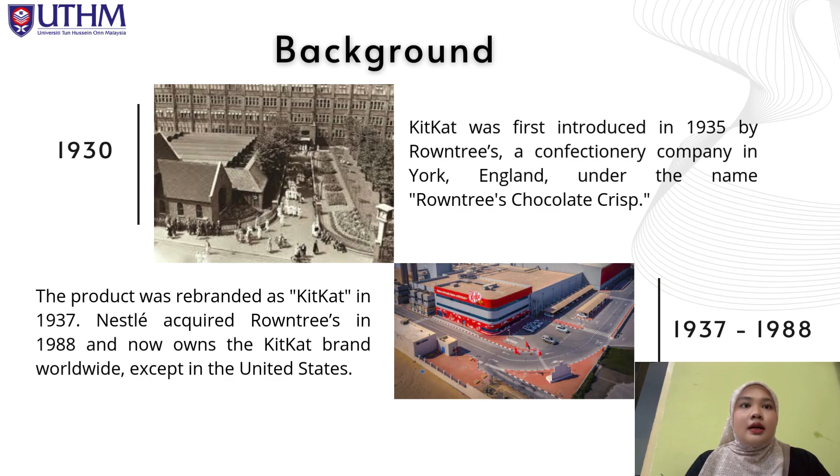Fast forward to 1988, and the brand underwent another significant shift when Nestle acquired Rowntree. Since then, Nestle has owned the KitKat brand worldwide, with one exception - the United States. In the US, KitKat is actually produced and marketed under license by Hershey. So in just a few decades, KitKat grew from a simple British treat into a global icon, enjoyed by millions across the globe, all starting from a small factory in York.

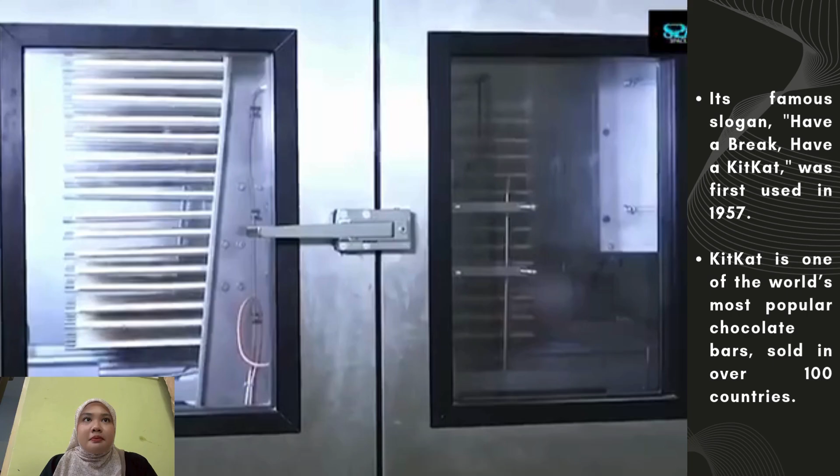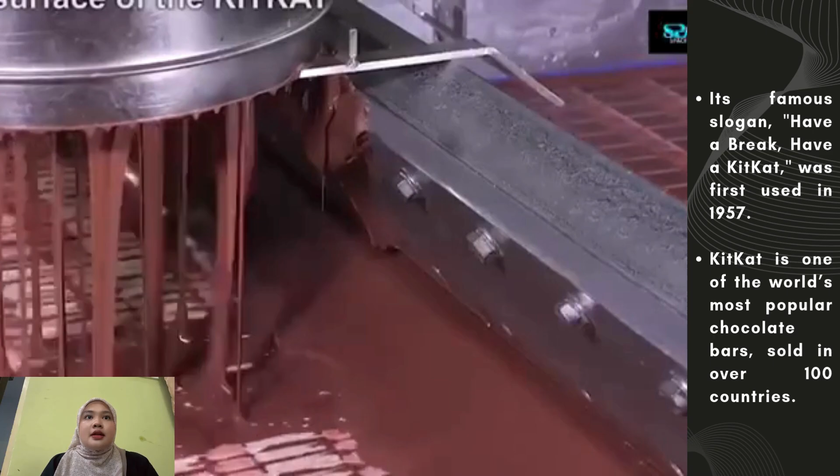Now let's talk about what truly made KitKat unforgettable. In 1957, the world was introduced to the phrase 'Have a break, have a KitKat.' Simple, catchy, and relatable, this slogan perfectly captured the idea of taking a moment to enjoy life's little pleasures. Over the years, it has become one of the most recognized advertising lines in history, cementing KitKat's place in popular culture.

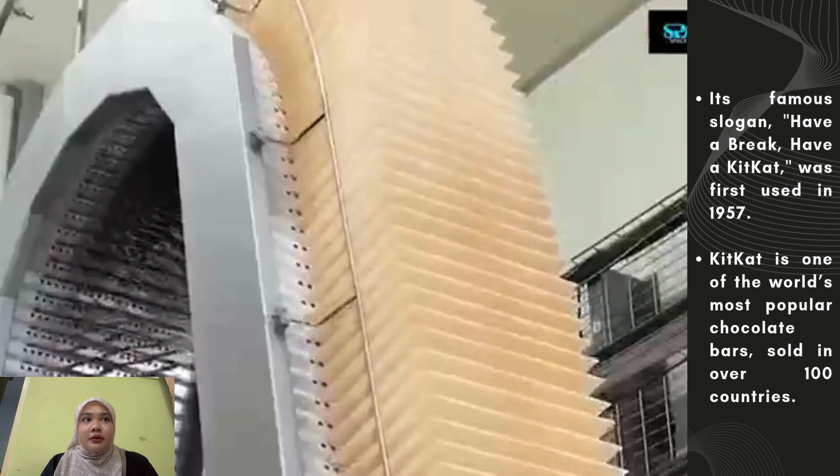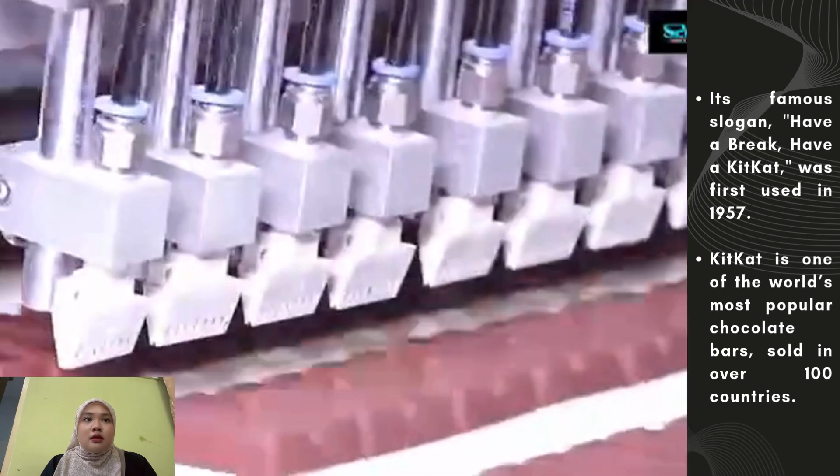But KitKat's success isn't just about its slogan - it's also about its universal appeal. Today, KitKat is one of the world's most popular chocolate bars, available in 100 countries. From the streets of Tokyo to the cafes of Paris, KitKat has become a global favorite, loved for its unique combination of crispy wafer and smooth chocolate. So whether it's the iconic slogan or its global reach, KitKat continues to delight chocolate lovers everywhere.

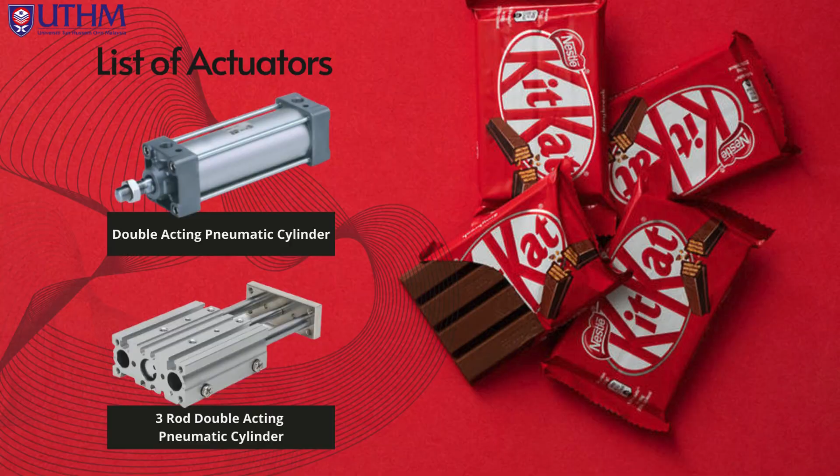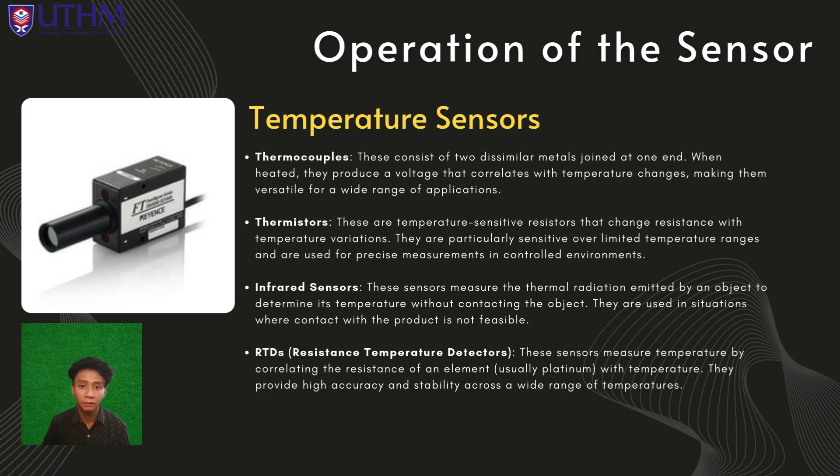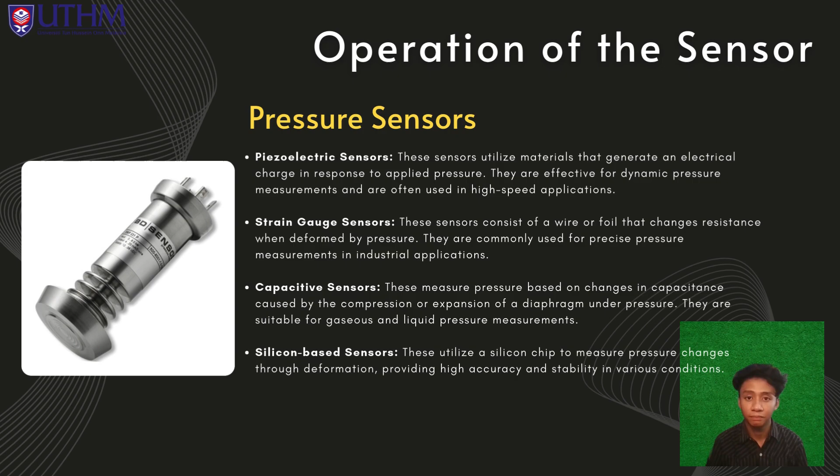Lastly is the quality control sensor, which is a light sensor. There are four types: photodiode, laser sensor, charge coupled device, and optical sensor. For the photodiode, this semiconductor device converts light into electrical current and is used for precise measurement of light intensity.

Secondly is laser-based light sensor, which can create a 3D image of the product by measuring the time it takes for the laser pulse to reflect back. It allows detailed inspection of the product dimension and surface condition.

Thirdly is the charge coupled device, CCD, often used in cameras. This sensor captures light and converts it into an electronic signal, useful for detailed image analysis and quality control.

Lastly is the optical sensor. They include infrared sensors that detect specific wavelengths of light to inspect color and brightness variation in the product. So the use of light sensors or quality control sensors is to inspect product appearance to ensure consistency and quality.

Detect defects and deviations in the packaging that could affect product aesthetic and marketability. It also assesses light reflection from the surface to monitor contamination or surface quality.

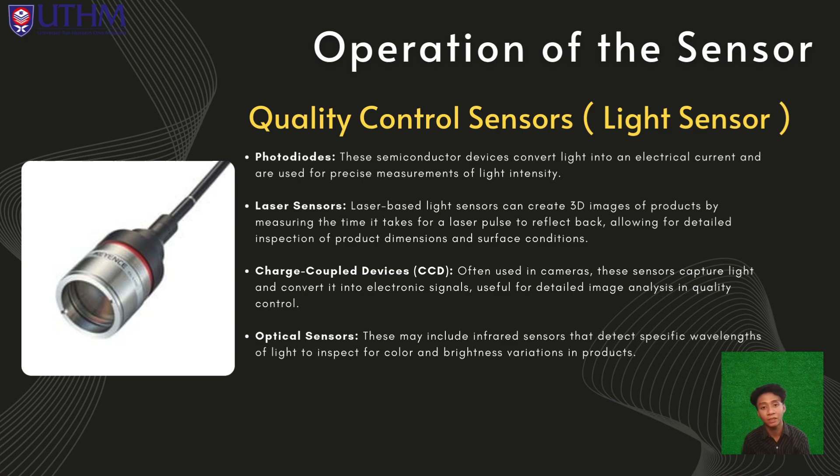For the operation of the actuator, the first identified actuator is the double acting pneumatic cylinder. This was found in the video at timestamp 206. It is seen when the wafer is being grabbed to be placed onto another position.

Multiple cylinders function together as a large gripper to grab the stacked wafer. From the video, we can see that there are at least four of these double-acting pneumatic cylinders on two sides of the gripper.

It uses compressed air to extend and retract the gripper connected to the end of the rod. The compressed air will flow and allow the cylinder to retract and extend accordingly, which also allows the machine to grab the wafer and move it to another place.

The next actuator found was the 3-rod double-acting pneumatic cylinder. This was found at timestamp 223. This was also found to move the stacked wafer, but this was when the wafer was already cut.

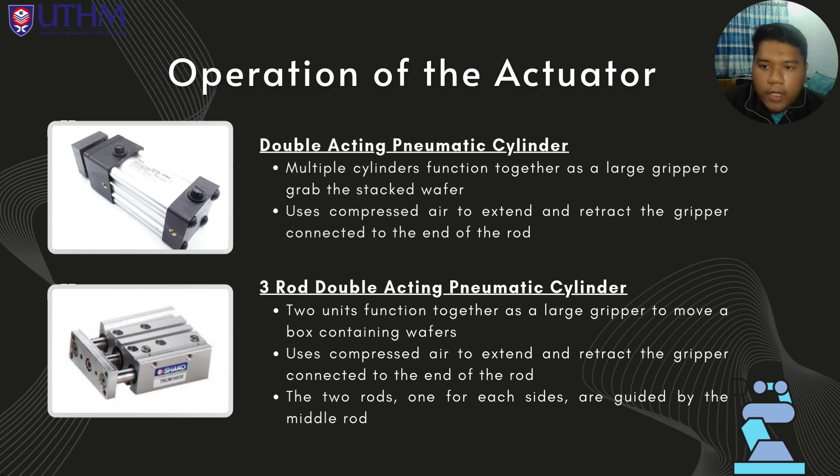I would like to present information about sensors. The factory utilizes a variety of sensors to monitor and control the manufacturing process. These sensors play a crucial role in ensuring product quality and safety.

The first point of information about sensors that we get through this video is the temperature sensor. Temperature sensors monitor the temperature of the ingredients and equipment throughout the production line. This helps maintain the proper temperature range for each stage of the process, from mixing to baking and from baking to packaging. The next one is pressure sensor.

Pressure sensor is used to ensure that various systems, such as packaging machinery, maintain appropriate pressure levels during operations. This helps prevent issues like product deformation or leakage.

Other than that is the light sensor. The light sensor is used for quality control purposes. They can detect flaws in the packaging, such as integrity issues, and monitor the appearance of the final product to ensure it meets visual standards. And lastly is the movement sensor.

Movement sensor tracks the movement of the product through the production line. The data can be used to optimize the manufacturing process and identify any bottlenecks or delays.

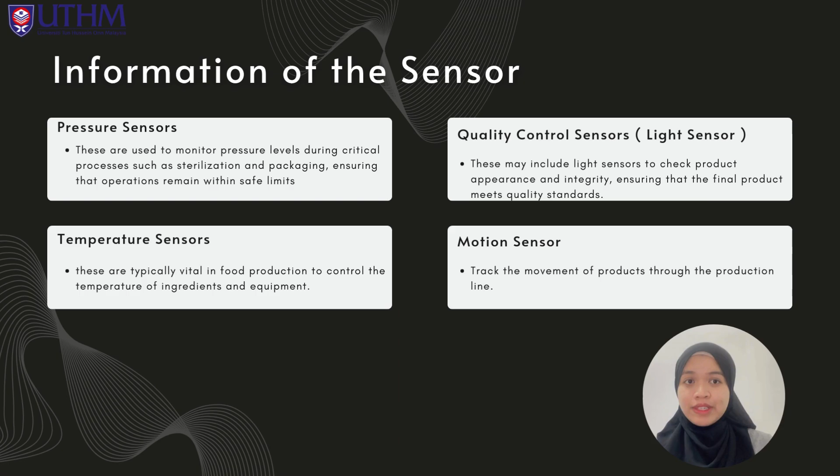Finally, together these sensors will provide the factory with critical real-time data that allows them to maintain tight control over the production process and deliver consistent, high-quality products. That's all for me, thank you.

Next, I will proceed with my presentation about the datasheet information of the sensor. The first one is the CL-L150, a 150 mm quad type sensor head paired with an optical unit. Details depend on the optical unit configuration.

The key features for CL-L150 sensor: first, the type is sensor head 150 mm quad type. The sensor head is designed to work in conjunction with a specific optical unit to perform as a complete system.

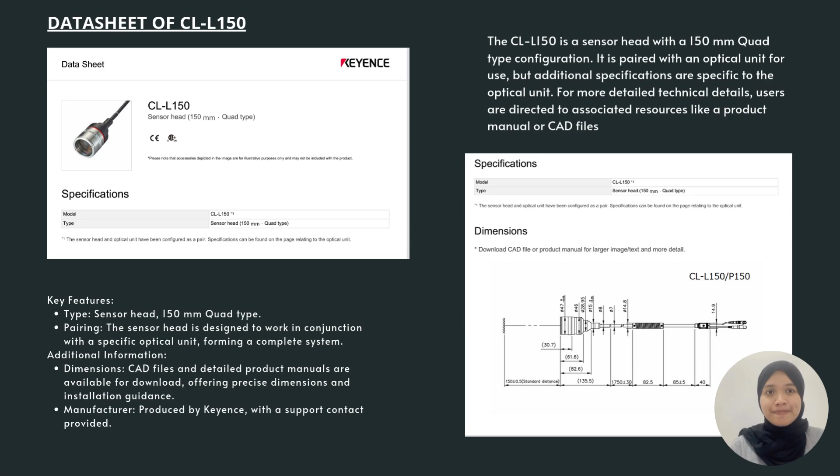DMP331P sensor is an industrial pressure transmitter designed for applications in industry such as food, beverage, and pharmaceutical.

The key features for this sensor: first, accuracy standard 0.35% FSO, optional 0.25% FSO. Next, pressure range 0 to 100 mbar up to 40 bar, gauge or absolute. The output signal for this sensor is 4 to 20 mA 2-wire, and 0 to 10 volt for 3-wire.

Other options are available. The hygiene design is suitable for CIP or SIP cleaning up to 150 Celsius, with low surface roughness. Lastly, the key feature for this sensor is vacuum resistance; it's designed for robust industrial environments.

Last one is additional information for this sensor. This includes optional versions: explosion-proof design, high temperature compatibility up to 300 Celsius with cooling elements, and special diaphragm Hastelloy and tantalum. This includes certifications: inspection certificate 3.1, test report 2.2, and optional SIL2 compliance for safety. Lastly is construction.

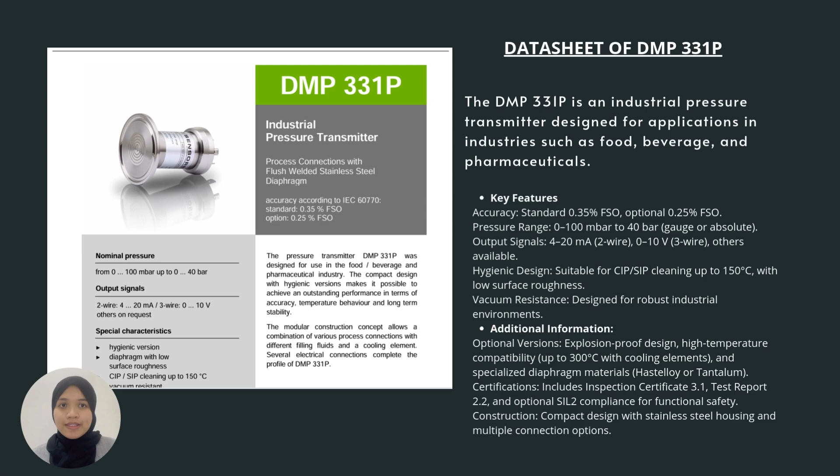This sensor is a compact design with stainless steel housing and multiple connection options. Now for the information about the actuator, we have two types: double acting pneumatic cylinder and 3-rod double acting pneumatic cylinder. For the double acting pneumatic cylinder, we have several specifications.

For example, we have several bore sizes: 32 mm, 40 mm, 50, 63, 80, 100, and 125 mm. The acting type is double acting. Working medium is air pressure. Maximum pressure is 1.5 megapascal, and working temperature is negative 20 until 80 Celsius. Speed range is 30 until 800 millimeters per second. The cushion type of the pneumatic cylinder is adjustable cushion at both ends.

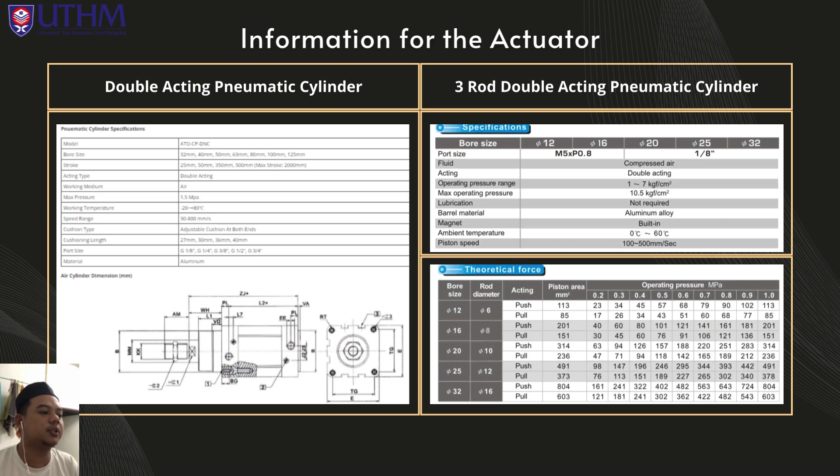That's all for me. Thank you.